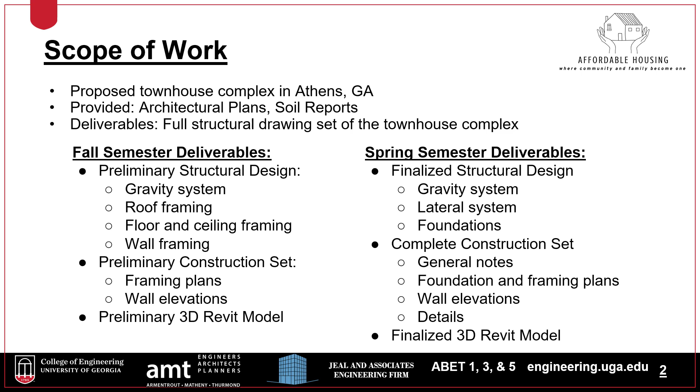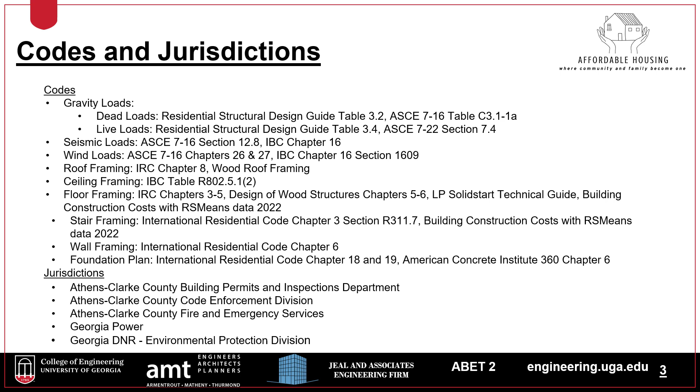After having the first meeting with the client, the team was able to identify the stakeholders associated with the project as well as what was expected of the team throughout each semester. When working on any project, the team understands that the community's health and welfare are a top priority. Many codes and jurisdictions have been followed to ensure that the townhouse complex is structurally sound and therefore keeps the public safe. The existing conditions of the site include approximately 43 acres of land located off of Hull Road in Athens, Georgia.

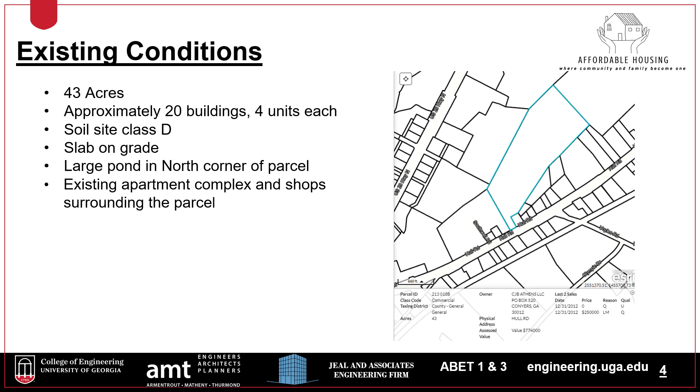Surrounding the site includes multiple businesses that would benefit from the proposed townhouse complex. The townhouse complex can provide a large influx of cash flow for the surrounding businesses, whereas the businesses may provide job security for future tenants of the complex. The goal of this project is to provide affordable housing for families in an ever-growing community. As Athens continues to grow, it is becoming more and more difficult for families to set their roots here due to the increasing price of homes.

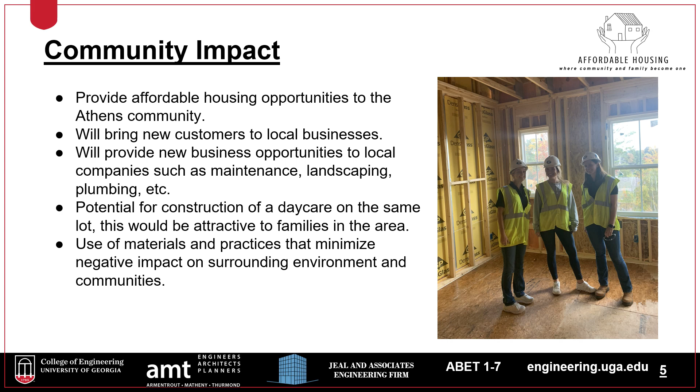Throughout the course of the project, the team conducted multiple tests using computer programs to analyze different material options and determine the most cost-effective yet structurally sound townhouse complex possible. As shown in the picture to the right, the team went on a site visit to better understand the needs of the client as well as the community. Before the team was able to conduct any test, all the loads on the townhouse complex needed to be determined. In order to create a structurally sound home, it needs to be able to withstand all the dead loads, live loads, wind pressures, and seismic forces acting on the building.

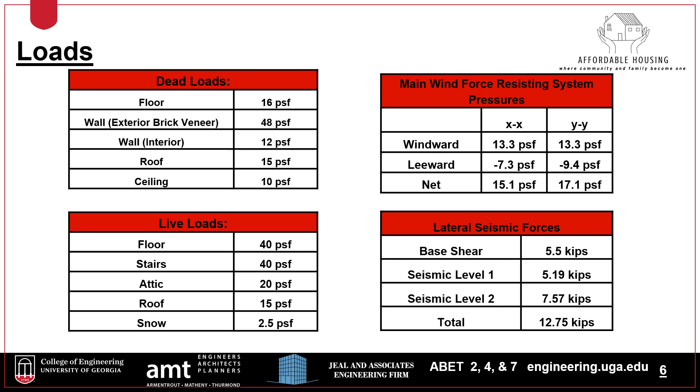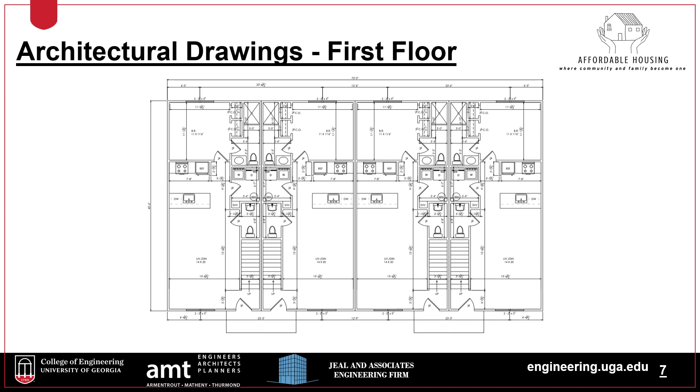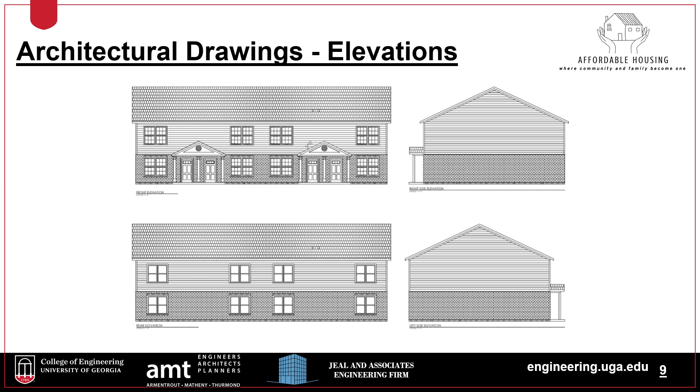The client AMT has provided the team with architectural drawings of the floor plan for the first and second floor as well as an elevation view of the townhomes. As seen in these drawings, one building consists of 4 two-story units with load-bearing walls being all the walls that run from north to south. The townhouse complex is to be built with brick veneer, allowing for an aesthetically pleasing view for the community.

The floor framing was designed using testing analysis through Louisiana Pacific software in order to determine the most economical I-joist and header sizes. After analyzing the data, it was determined that the most economical depth for the I-joist and headers is a depth of 14 inches. This larger depth allows for the I-joist to be spaced 24 inches on center, therefore requiring less I-joist overall. The I-joist will be a common prefabricated member, therefore allowing for a faster on-site construction time. Headers will consist of 2-ply LVL with a total width of 3.5 inches to carry the stair live loads. The OSB rim board will be in place to allow for easy connections of the I-joists.

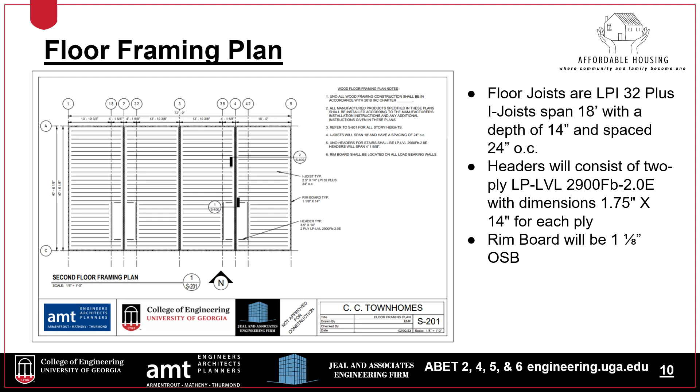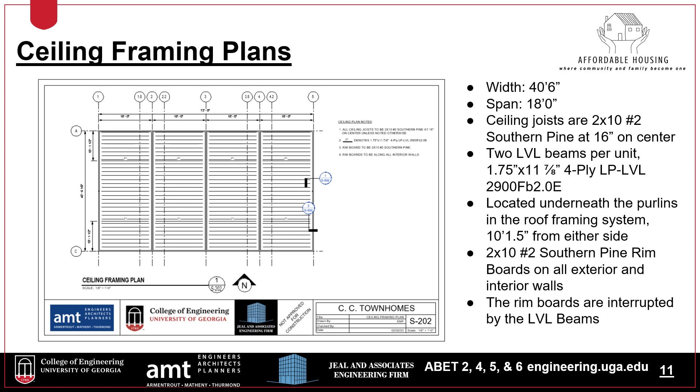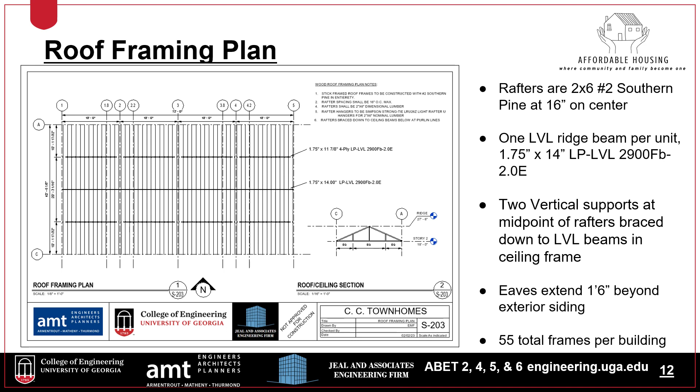The roof framing system consists of rafters that are 2x6 No. 2 Southern Pine at 16 inches on center. This material was chosen with cost-effective decision-making, similar to other framing systems. There is 1 LVL ridge beam per unit. The size of the ridge beam was also determined using software analysis, and the most economical size was determined to be a 1.75 by 14 inches. The material used is LP-LVL 2900Fb-2.0E, because this is a very common material for this purpose. 2 vertical supports at the midpoints are braced down to the LVL beams in the ceiling framing. The eaves extend 1 foot 6 inches beyond the exterior siding. There are a total of 55 frames per building.

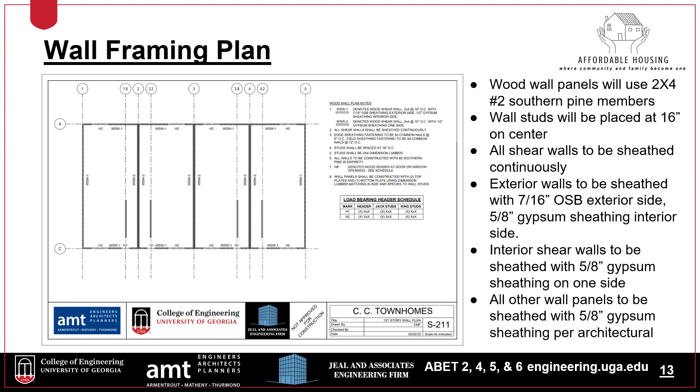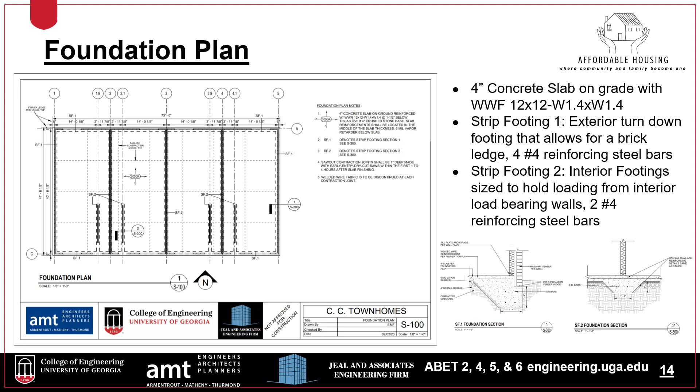The foundation plan was determined using the International Residential Code as well as the American Concrete Institute. It was determined that the concrete slab will be 4 inches deep with strip footings along all exterior walls as well as all interior load-bearing walls. The slab will be on grade and will be reinforced with welded wire fabric that is discontinued at each saw cut joint. This discontinuation allows for a smaller required area of reinforcement, therefore allowing for a more cost-effective approach. The exterior strip footings include a 6-inch ledge that allows for the brick veneer to sit on. Both types of footings include steel reinforcement to ensure it will hold all the loads from the building.